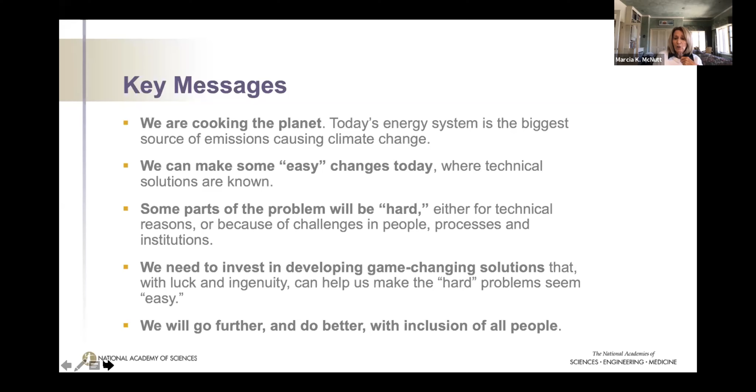And finally, we will go further and do better if we include all people in our approaches.

Now, let's start with the easy stuff. There are 3 things we can do today that are low-hanging fruit: we can decarbonize electricity generation, and along with that electrify more end uses, and third, we can reduce energy demand while increasing value, comfort, and convenience. I'll give you some examples of all of those.

First, what we can do today to decarbonize electricity generation. These are some examples where fossil fuels are burned for space heating, water heating, and industrial processes, releasing CO2. Some of these processes are relatively easy to electrify, including space heating in homes and businesses via electric heaters, heat pumps, and heat and power.

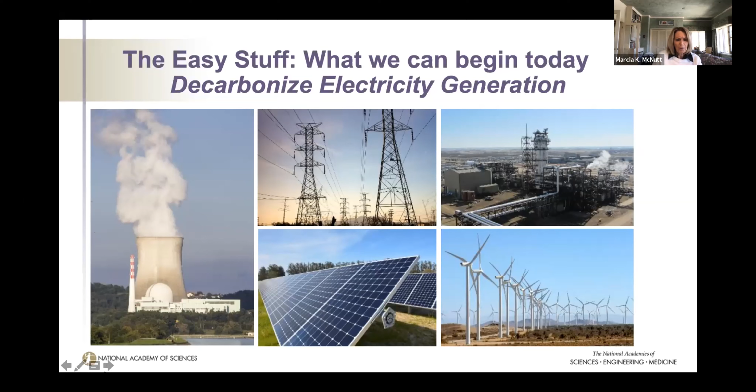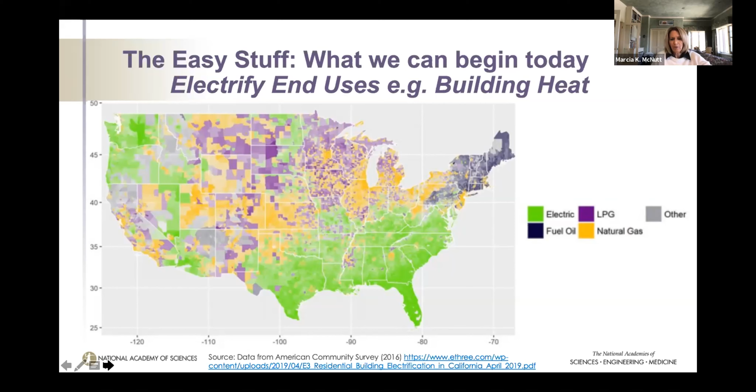Furthermore, this is a map that shows how we can electrify end uses. This is just an example of building heat, showing across the US the different kinds of building heat in use today. In the Northeast, it's largely fuel oil or other, which is probably wood stoves, etc. In the Southeast, it's already mostly electric, as well as in the Pacific Northwest. Through the Midwest and parts of California, we have LPG, and in many areas there's also natural gas piped into homes. So this shows that we have a lot of room to grow in terms of electrifying just building heat.

Now, also among the easy stuff is reducing energy demand, for example through efficiency. This plot shows in the blue line on top how, from 1972 up to 2016 on the right, the volume in cubic feet of refrigerators has increased — not a lot, but to some extent.

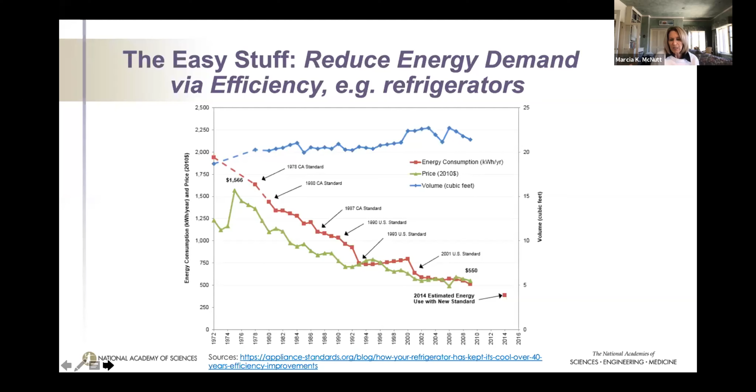At the same time, the energy demand from those refrigerators has dropped precipitously, from 2,000 kilowatt hours per year down to a quarter of that, down to 500. And at the same time that energy demand has plummeted, so has the price. So this is a win-win-win situation: we can have bigger refrigerators that use less energy at lower cost. You can imagine that this type of curve can be replicated with other electric appliances.

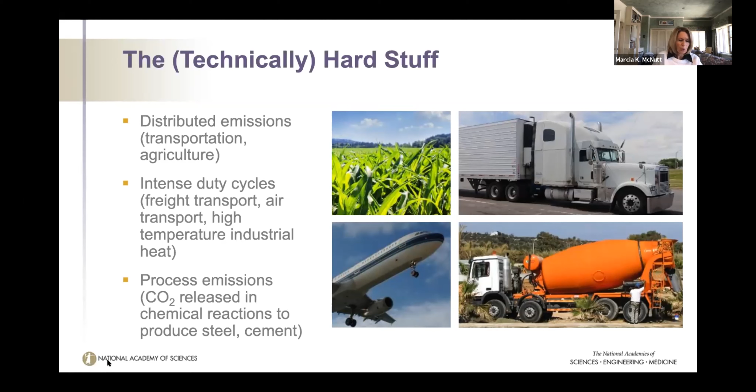And there's also logistical challenges. Even when technologies are known, logistical challenges lie in building out the infrastructure, in implementing technologies because they cost more upfront than the higher carbon emitting technologies. And also there are logistical challenges in motivating consumers when they have no financial incentive to purchase a lower emitting technology. Right now we've seen low fossil fuel prices, which leave little consumer incentive to switch, for example, to renewable electricity.

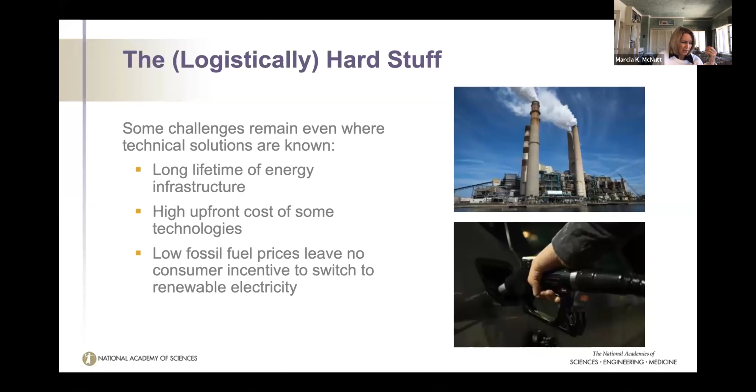So how much is reasonably easy with the technology we have today? Well, surprisingly, about 70% we can do with technology we have today. The easiest stuff is about 30% of emissions, which is decarbonizing electricity generation and efficiency improvements. The moderately easy stuff is another 40%, for example, light duty vehicle transportation, some building and industrial electrification. So that leaves only about 30% that is hard to do with the technology we have today.

And so focus has to be on developing the game-changing technologies to make it easier, and that should be the focus for investments to provide our future options.

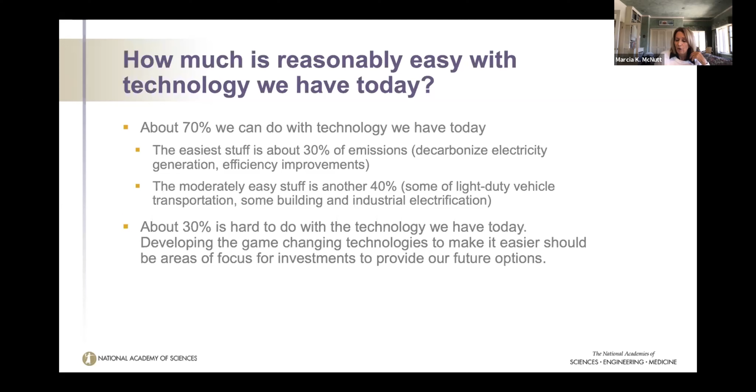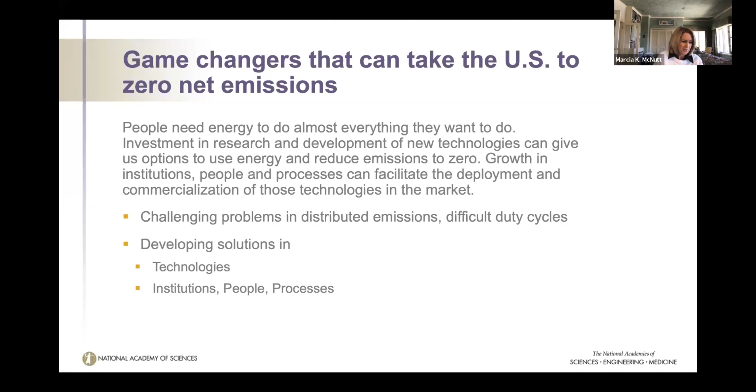So let's look at game changers to take the US to zero net emissions. People need energy to do almost everything they want to do. Investment in research and development of new technologies can give us options to use energy to reduce emissions to zero. Growth in institutions, people, and processes can facilitate the deployment and commercialization of those technologies in the market. But there are challenging problems in distributed emissions, the difficult duty cycles which I mentioned, and developing solutions in technologies, institutions, people, and processes. Those are where we need the game changers.

So where might we look for some of these game-changing technologies? We can look at algorithms and other means to maintain grid reliability with intermittent renewables. We know that the sun isn't always shining, the wind isn't always blowing. How do we compensate for that? We need to look at advanced nuclear electricity generation. I don't have to repeat to this audience what the concerns are about the current generation of nuclear power plants. We can look for net zero carbon liquid fuels, and I'll talk a little bit more about that, and negative emissions technologies, which I'll also talk more about.

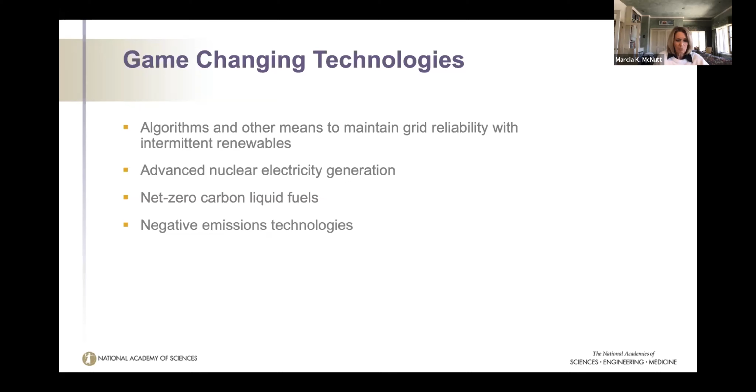So, algorithms to maintain grid reliability with intermittent renewables. Renewable generation is one of the major keys to decarbonizing the grid, but it represents reliability challenges and the need for storage, better batteries, for example. But algorithms can provide functionality to maintain safety and reliability. There's the potential to create, for example, something called virtual storage through coordinating building loads, EV charging and discharging, so that we don't have to actually really store things, but just balance the load in ways such that we're smart about how we use that renewable energy.

And we can use machine learning with self-improving algorithms and artificial intelligence. That all has future potential. But all will necessitate cybersecurity considerations and improvements. We've all heard of some of the hacks on power generation facilities and how vulnerable we can be to those. So we can't forget about cybersecurity.

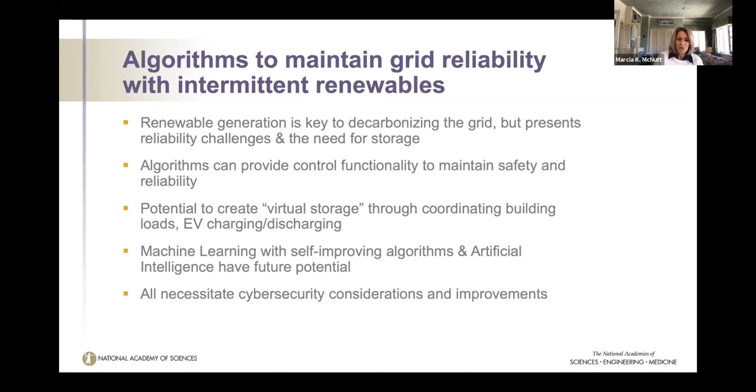Now, grid integrated buildings offer the ability to shift electrical load to meet supply. So we imagine the old days where a building just connected to the grid and it pulled power from it. Now, grid integrated buildings are smartly integrated to the grid such that they are efficient, they're connected, they're smart, and they're flexible. They are persistent in their low energy use. They minimize demand on grid resources and infrastructure. They're also connected two-way with flexible technologies to the grid, between the grid and the occupants. They're smart. Analytics are supported by sensors and controls that co-optimize efficiency, flexibility, and the occupant preferences.

And they're flexible with loads and distributed generation; storage can be used to reduce, shift, or modulate energy use. You imagine one person in an office is always too hot, the person in the office next door is too cold. There's no need to turn on the air conditioner for one person and the heater for the other person if you can balance the heat appropriately.

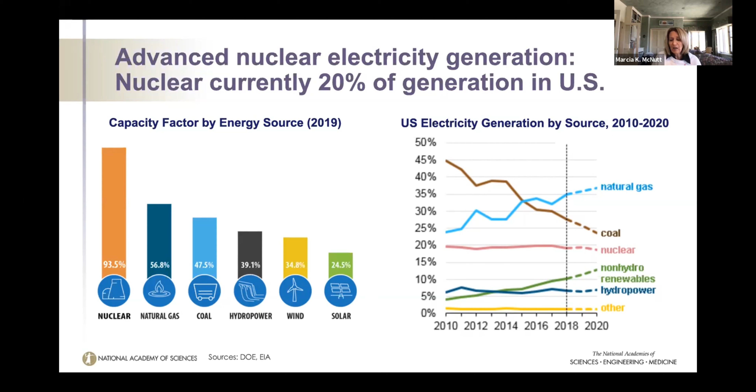So if you need to replace nuclear with other no-carbon sources, you have to create a lot of solar and a lot of wind to replace that nuclear. Now, if you look at US electricity generation by source on the right side of the slide, nuclear is projected to slowly decline in the future, while non-hydropower renewables are projected to go up, but they have to go up a lot to compensate for any loss in nuclear.

Furthermore, if you look at the age profile of nuclear power plants in the US, with the United States on top, the red bar shows plants over 30 years old, and blue shows less than 10 years old. You see, for example, compared to China, how old our fleet of nuclear power plants are. If we don't look at renewal of nuclear generation very soon, we will be rapidly losing capacity of a type of power that produces no CO2.

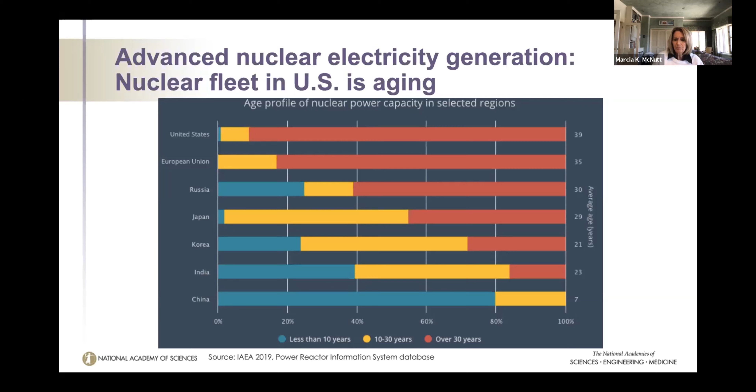So advanced nuclear electricity generation is an area of intense research right now. The Nuclear Regulatory Commission regulations are based on what are called light water reactors, and these are basically glorified steam producers. The reactor core heats circulating water that ultimately becomes steam, that rotates a turbine, that generates electricity.

These reactor designs have very high capital costs, long deployment timelines, and large space requirements. They must abide by rigorous safety regulations, and they cannot be close to high population areas because of that. Thus, they require large investment in transmission infrastructure to get the power from their siting to where it's needed.

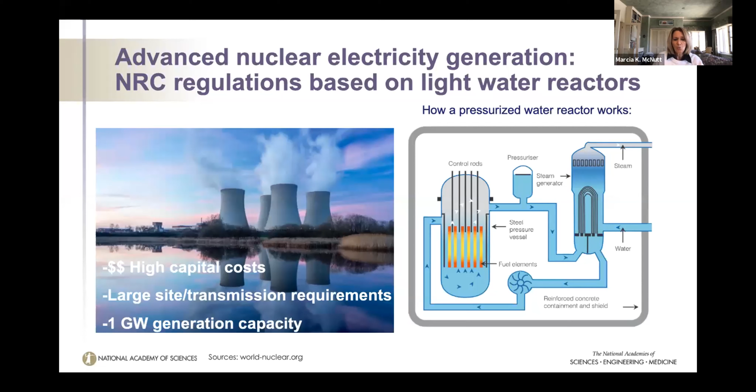Now, advanced nuclear electricity generation has to compete with natural gas right now if it's going to be economically viable. This diagram shows the net additions and retirements in natural gas as compared to nuclear. The solid brown bar shows new natural gas power generation that's gone in, and the stippled brown shows the ones that are projected. The solid blue shows mostly nuclear retirements and just one addition, and the stippled blue shows a few nuclear additions, but mostly planned nuclear retirements. So you can see it's quite obvious that nuclear is having a very hard time competing with natural gas.

That makes the future of nuclear very uncertain, and marketplace concerns are the biggest problem. For this reason, new reactors are being designed as small modular reactors, which have nowhere near the space requirements of traditional reactors and therefore lower capital and safety costs. Many have passive safety features, meaning the reactor does not require any active intervention or electrical feedback in order to bring it to a safe shutdown.

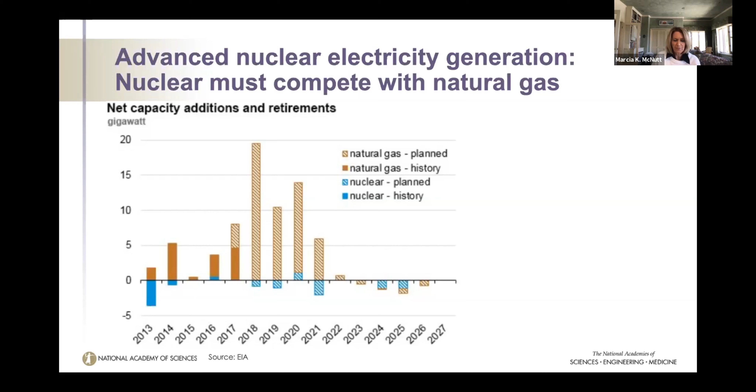So here's what advanced nuclear electricity generation, the small modular reactors, looks like. They have a pressurized water reactor, lower capital costs, factory assembly, small siting requirements, and passive safety features.

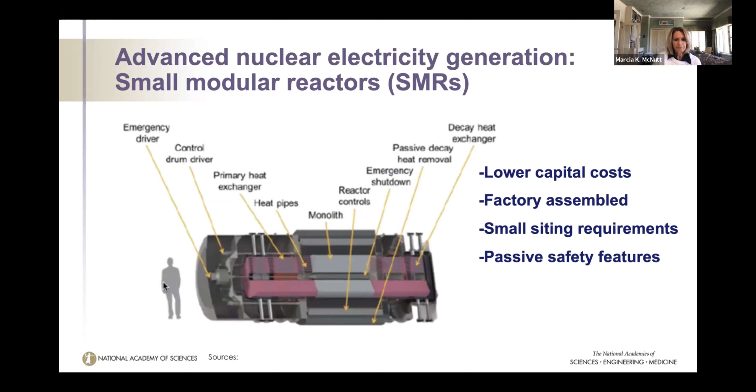Now here's the various generations. Gen 2, which are the pressurized water reactors and boiling water reactors, are already built. Gen 3, there are some built by Westinghouse in China and the US. They have a simpler design, but they're still light water reactors.

The NuScale ones, which are on the drawing board now, are furthest along in the regulatory process, but many other advanced reactors are in the works. These Gen 4 designs operate at higher temperatures and use cooling media other than water. DOE recently announced the Advanced Reactor Demonstration Program, which aims to help some of these unique designs reach demonstration and potential commercialization.

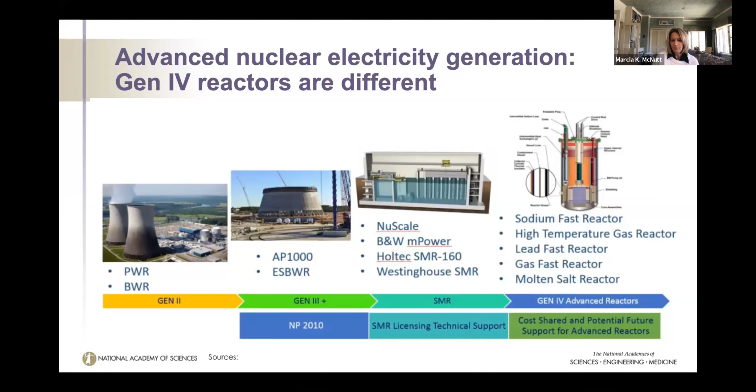So these Gen 4 reactors are different. The regulatory landscape may have to be completely overhauled to accommodate advanced reactor concepts because of the difference in cooling media and different types of fuel, most notably high assay, low enriched uranium, an enrichment level that currently isn't available in the US.

Many advanced reactor companies are considering economic viability to be their number one priority. So many are also designing their products to be small modular reactors with potential alternative applications and the ability to cooperate with renewable energy sources. In other words, when the sun isn't shining or the wind isn't blowing, they're working in tandem.

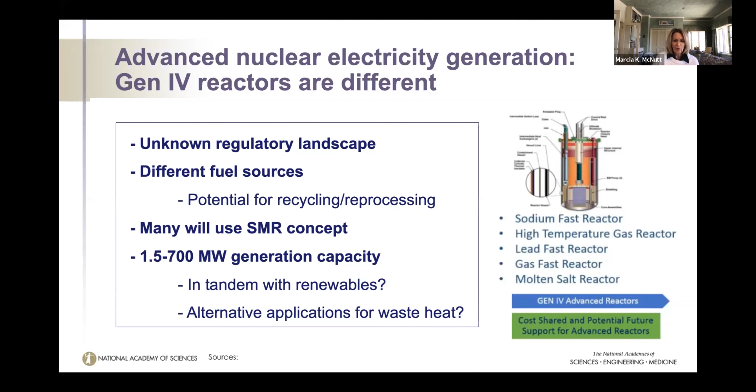So let's go on to net zero carbon liquid fuels. These use water and captured carbon dioxide, or waste biomass and renewable energy, to generate liquid fuel replacements for fossil fuels. The fuels can be stored, transported, and used as needed, and when burned to do work or provide heat, they release only the carbon dioxide originally used to make them. So it's a net zero carbon cycle.

The net zero carbon liquid fuel process will use more energy than direct use of fossil fuels or electricity. So the uses are probably best when a liquid fuel is needed, because in addition to the energy from the sun to grow the plant feedstock, you also need solar or wind energy to make the liquid fuel. So that energy is used at two places in this cycle. There's probably going to be limited use of it, but it could help us get to net zero energy.

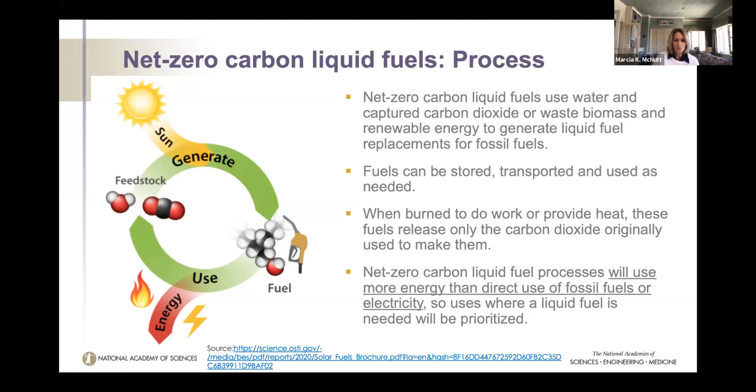Challenges include technical ones: chemical catalysis to improve selectivity, formation of carbon-carbon bonds, biological process improvements in growth, treatment, carbon-free hydrogen. Commercial drivers include economic value, scale, market capacity, and market penetration of these new fuels. And then there's supporting infrastructure and technology: new supply chains, transportation, energy and material inputs, renewable energy, H2, etc., particularly getting biological feedstocks that won't compete with human consumption.

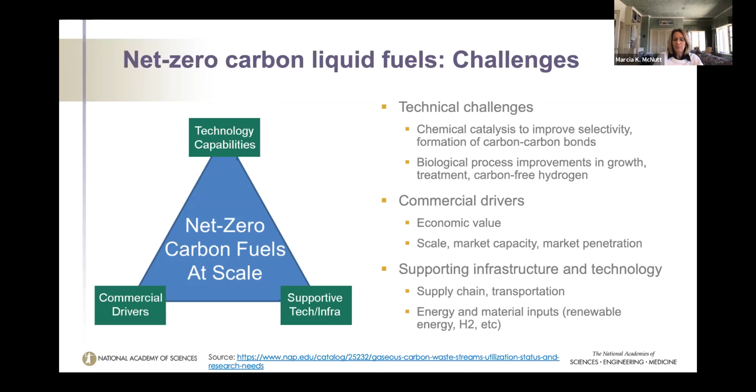Next, let me go to negative emissions technologies. This is something the Academy has looked into. Negative emissions technologies are best viewed as a component of an emissions mitigation portfolio, not technologies deployed once society completely eliminates emissions from all transportation, electricity, industrial, and other sources. Although, I don't know when we'd ever get to that point.

Removing CO2 from the atmosphere and storing it has the exact same impact on atmosphere and climate as preventing an equal amount of CO2 from having been released in the first place. In some cases, deploying negative emissions technologies may be cheaper and less disruptive than actual emission reduction, particularly for difficult-to-reduce sources such as aviation, heavy industry, or agriculture.

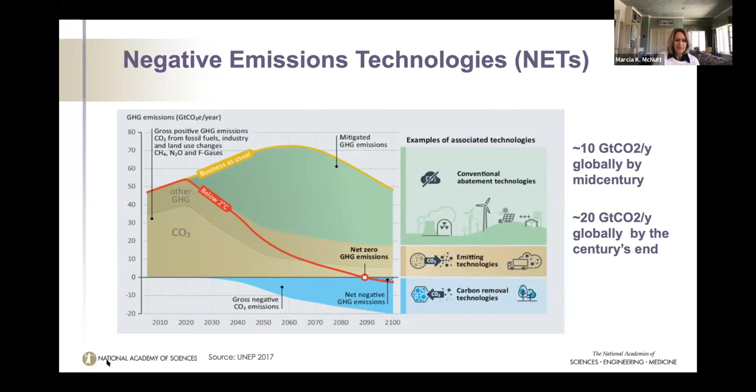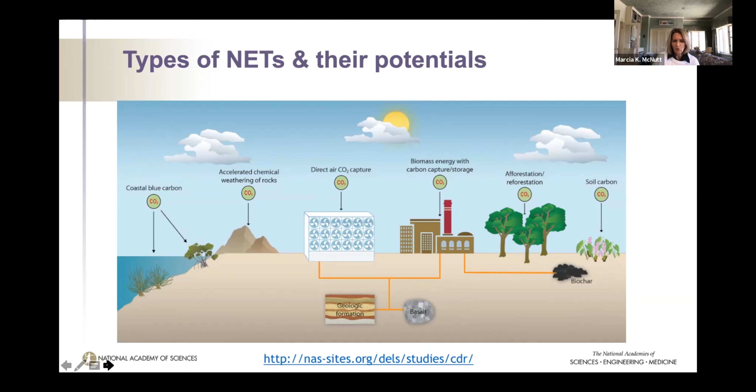So here are some types of negative emissions technologies and their potential: coastal blue carbon, accelerated chemical weathering of rocks to store CO2, direct air capture of CO2, biomass energy with carbon capture and storage, afforestation or reforestation, and soil carbon capture. All of these are covered in Academy reports.

Okay, let me go to game changers in institutions, people, and processes. As I've said, some of these are some of the harder things to do. We need new coalitions built of voters and consumers who demand low carbon lifestyles that also deliver health, safety, and opportunity. We need continent-wide transmission investments to build renewables to demand centers, a circular economy in carbon and all other materials, and to deal with fossil fuel dependent communities. We have to give them other kinds of economic opportunities.

Now, the new coalitions. Climate change will impact all people on the planet, and the most vulnerable will suffer the most. People continue to want light, warmth, cooling, and work that energy provides, but new coalitions are building that tie together energy access and affordability for all, people's health and livelihood, and the environment.

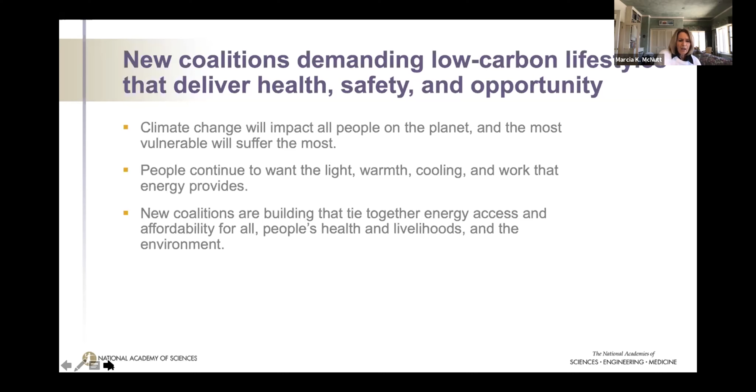So let's look at the problem of transmission. The location of renewable energy generation facilities depends on where the sun shines, where the wind blows, where geothermal energy is, etc. But renewable energy without storage can't be turned on and off. So balancing renewable electricity supplies with demand loads can be done with energy storage, with improved forecasting, and with transmitting power over long distances.

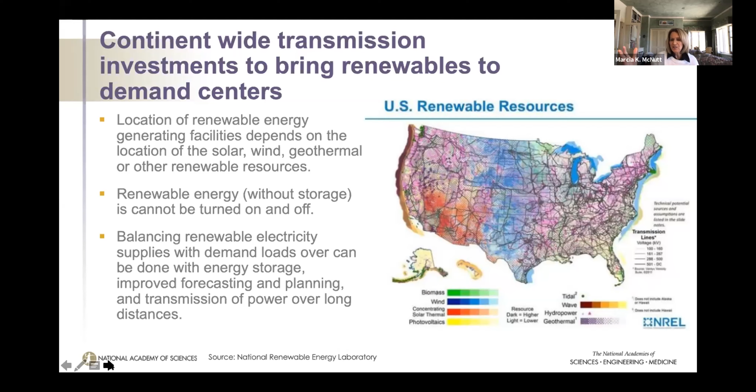So how do we balance it? If the wind is blowing someplace, but the sun isn't shining somewhere else, we can get energy from where it's being created to where it's needed. So high voltage DC converters and lines can transport power thousands of miles with limited losses.

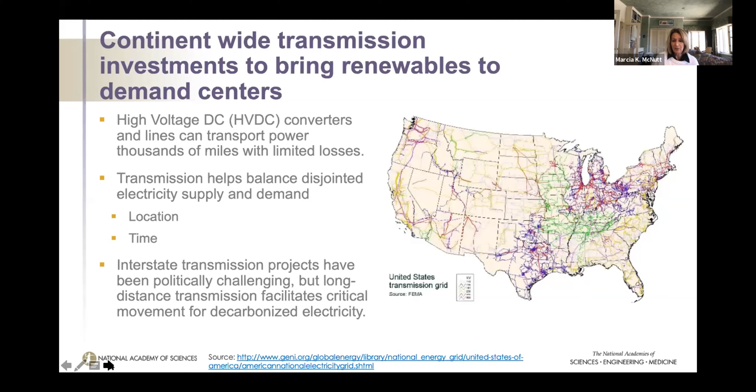Transmission helps balance disjointed electricity supply and demand, but interstate transmission projects have been politically challenging. Long distance transmission facilitates critical movement for decarbonized electricity. But as I say, it's been hard to do. Transmission planning is federal, but authority to site and build the lines typically lies with states. There have been difficulties with cost sharing as well.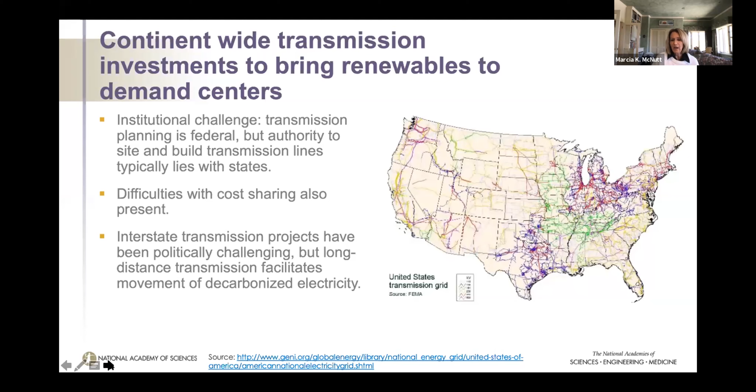Interstate transmission projects really have to be dealt with in order to move this decarbonized energy. You can see that there are very few in the West, where we have an abundance of low carbon energy.

Now let's go to the circular economy and carbon. Of course, a holy grail is to find reuses of carbon. The current process, shown in the gray line, follows a take, make, use, dispose, pollute model. We take the fuel, we make something out of it or use it, we dispose it, and we have carbon pollution. A circular economy would reduce or eliminate pollutants, including emissions, by recycling them - using it, reusing it, remaking it, recycling.

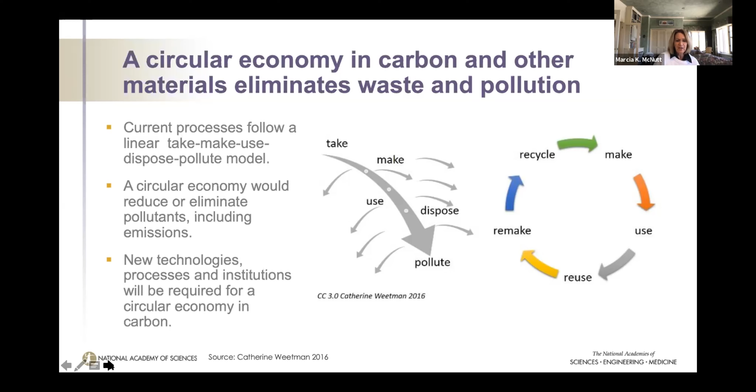New technologies, processes, and institutions will be required to make that circular economy. So this comes from a recent report from the academies to identify the status, barriers, and opportunities for commercialization of technologies that utilize carbon dioxide waste gas. Promising areas include mineral carbonization and chemical and biological conversion.

So mineral carbonization would include, for example, cement that is made from a waste CO2 stream, or chemicals and fuels that are made from waste CO2. In the case of construction materials, it would be sequestering CO2 in long-term buildings.

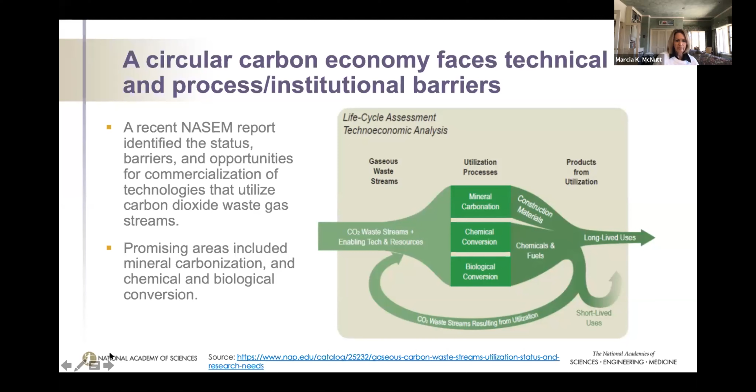But of course, there are unique challenges for resource extraction-dependent rural American communities. There's a tax base from coal generation in the West that can result in huge tax base loss for rural communities. We need to consider fiscal policy reform to address the failings of current business models, regional and multi-sectoral coordination to reinvent the urban-rural social contract on energy service, and how to re-envision rural economic development through developing robust institutions, resilience, and useful infrastructure, rather than simply replacing old energy technologies with new ones.

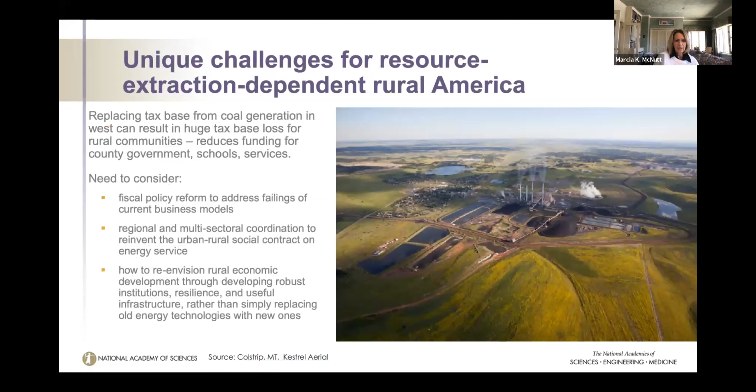We can't solve the climate energy problems unless we solve it together. We need to make the solutions about jobs, about health equity, about environmental justice, about access to quality of life, and a future for everyone's children. Because these are values that everyone can agree upon. And if we bring everyone together into the discussion, we're much more likely to make progress on this.